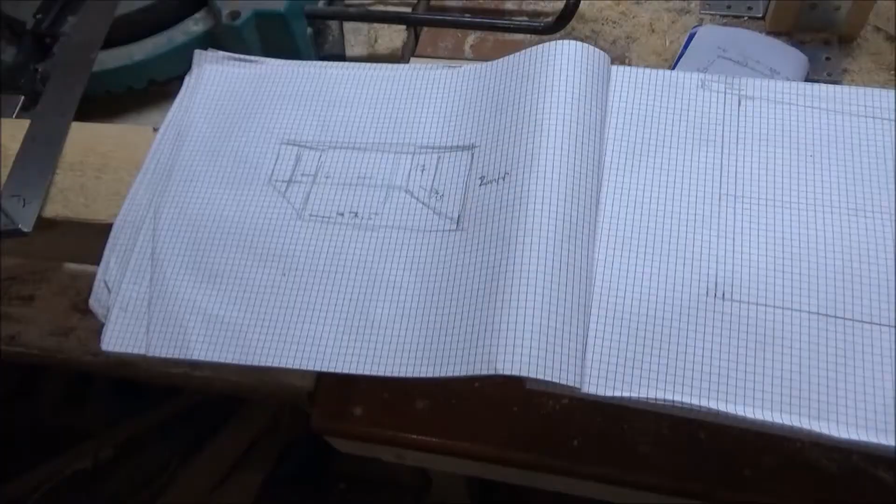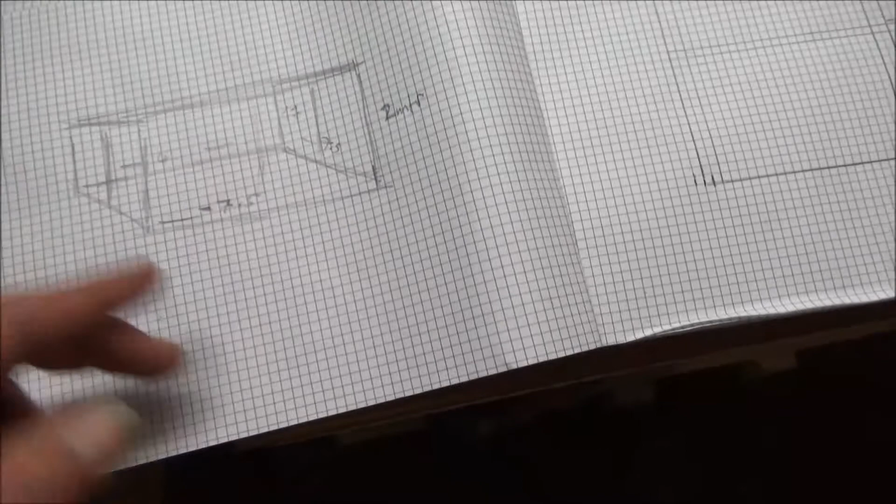So I had a few challenges getting this frame up, which I knew I'd have, but I'll show you a couple of solutions I came up with, because basically it's flat but it's not level, it falls this way and this way. So what I ended up doing, I went out with my tape measure, put a long lath and put my level on that and took a level off, starting at a point.

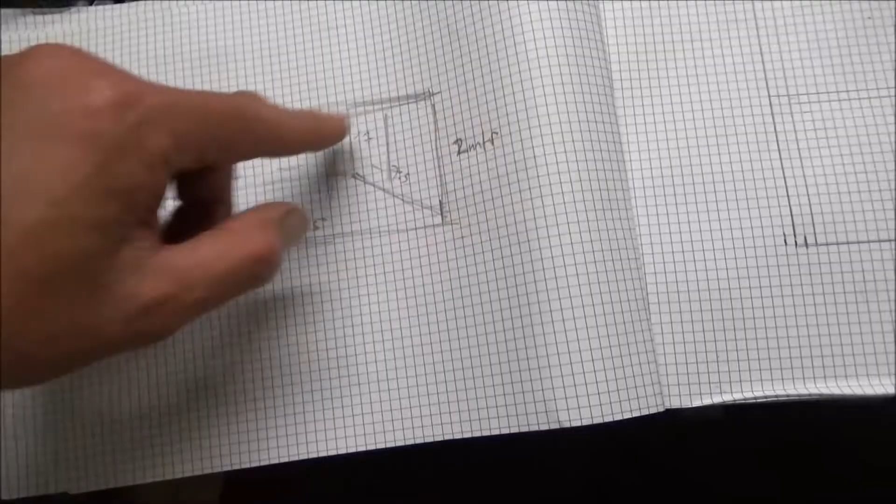That was -4, that was -7.5, that's -7.5. So I could cut my corner post, but I couldn't stand them up and support them and do all measurements, so I ran the level off at the bottom and it worked out well. I'm very happy at how that worked out.

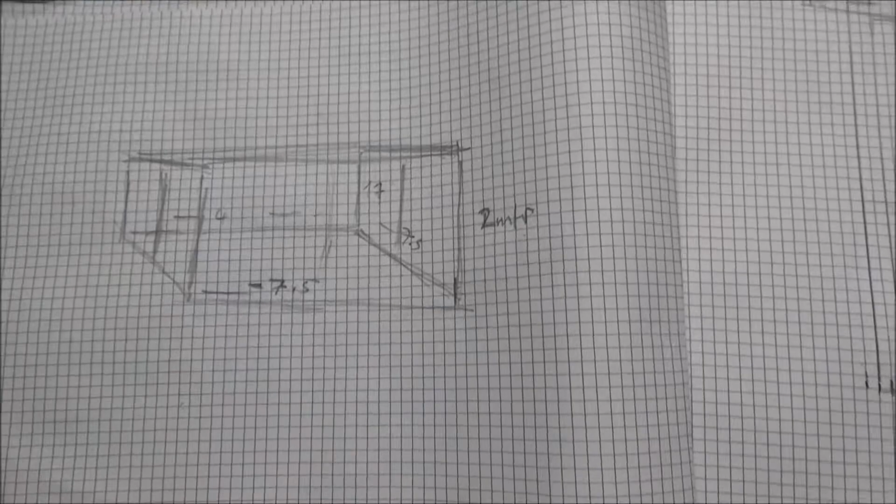I worked the angle for the roof out, and basically that's just a scale drawing so that I could find this angle here, because what I wanted to do was cut the posts in like this.

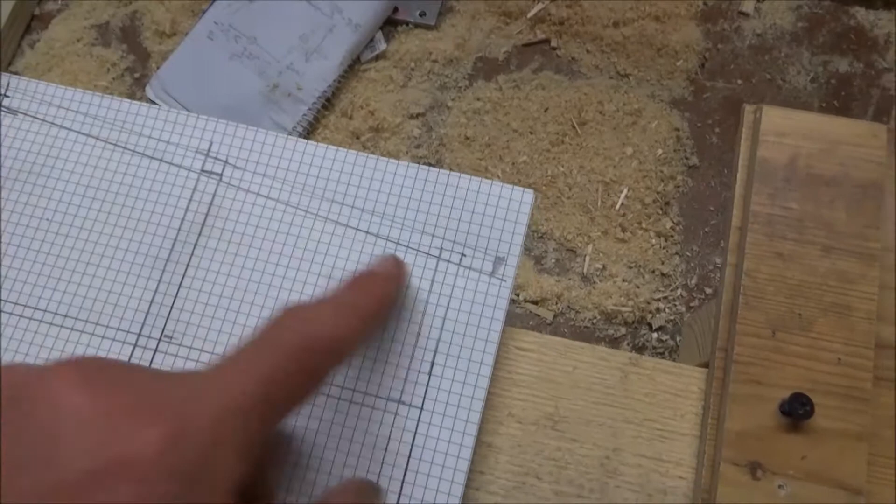Now I could do it by hand, but I ended up making a jig, screwed down, and I worked that angle out because that's coming up plumb and that's got a fall on it from 2 meters to 1.8 meters. Well, a 20 centimetre fall, because it's not 1.8 meters, the floor's not level. So that's what I meant about that.

But this worked out well, and it's cut. I've cut all of them. That's for the middle set, which will go in here.

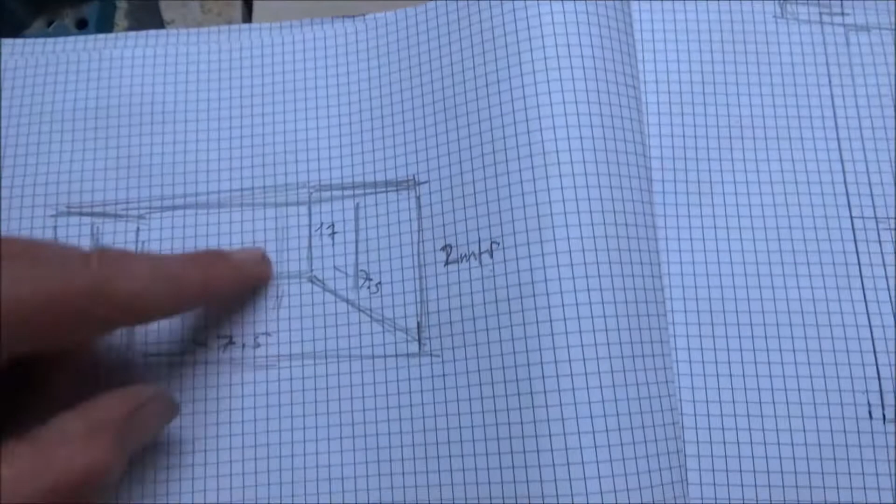But what I'm also thinking about now, I've got to put something across at about a metre height. I've got to get it all level. I'll show you how I'm going to do it.

I did think about dovetailing some roof lathing. I had a piece of roof lath somewhere, I was going to dovetail it in like that. The only reason is because I'm going to do another jig for the router, but I'm not happy, it's only 12.7, and that's the biggest dovetail I've got. What I would have done is cut that out and sunk it in like that. I did think about that, but that'd be quite time consuming, even with jigs.

So what I'm going to do is a jig and cut up posts, and cut that in so that it's flush, it runs through, and I might just put a couple of pegs in rather than screws. Look quite cool. This wood's really rough, but hey, what can I say.

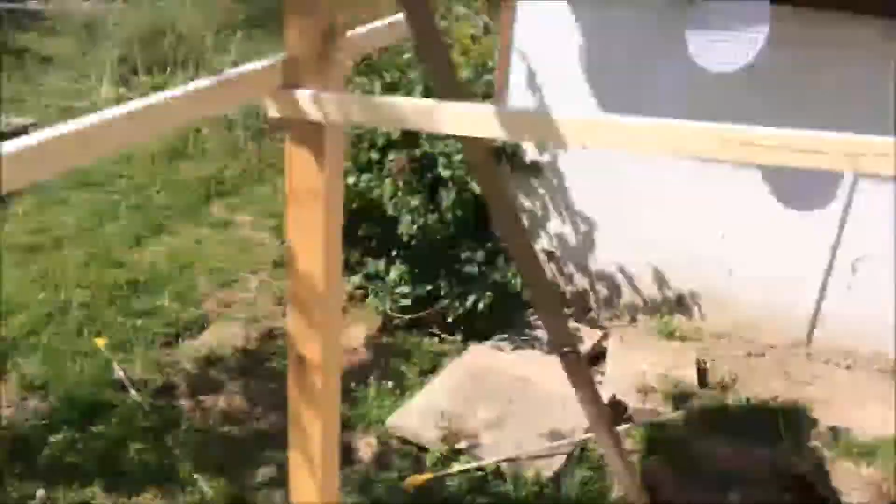I'm getting there. These I all pre-cut and was a bit worried that I might have not got the lengths right, but looking at the level, I'm alright there, across there, and they're two important ones, front and back. I've got to put another post up there.

I just made this just to make life easier and quicker, basically, so I can mark my posts out. Obviously middle posts, left and right, and corners at corners, but it made life so much easier just marking them all out at once. And I'm just waiting for the battery to charge up again.

Just use that little Bosch, it's really good for that sort of stuff, because my main worry is corners breaking off. So, but yes.

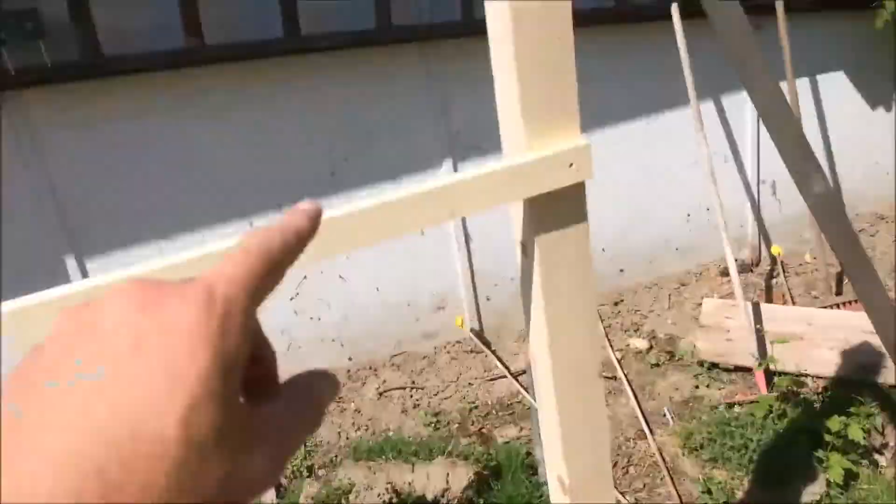3 inch. I've got to put middle ones in, but I'm going to cut them out after, going off my line across the top there and here as well. I'm doing them flat and I'm going to cut them in, just come in a centimetre at this end, and whatever it comes down to at that end of its loop, I'll cut them in.

I've just started cutting one out by hand, but I'm probably going to make a jig for the router to do that. I've got 8 to cut, and when I've started I can finish off with the router.

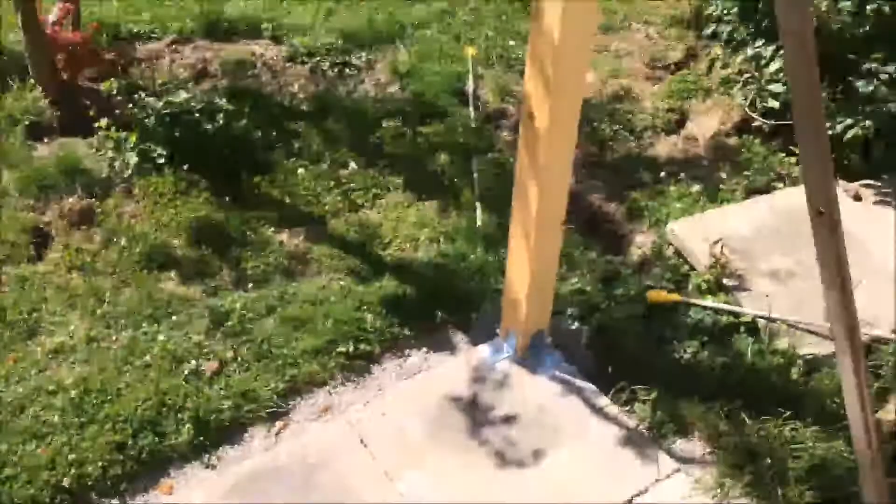I'll get these up and just squared up, because what I'll end up doing is I'll paint them where they are standing. I will take them off and paint the bottoms, and I'll paint the top before I put it on with stain. So I've only got like 2 screws holding that.

Brackets are down first, but just 2 screws in each post so I can wiggle them and get them up to square.

So these posts I want them to fit into roof beams. I've built a jig. It's messy because it started without this side and without that. It was just 2 slots to go left and right, but I was finding I was dipping in, so that just gave me a bit more support.

If I'd have ever made many jigs for a router, then I would have probably known that it needs supporting all the way around. That's what I would do if I did it again. I'm not doing it again.

I'm cutting these. I want to get it done, but that's the result from it. I'm quite pleased it fit, so I've got to neaten them up with that, with a router jig on the ones that I've already done on the roof.

I started cutting by hand, because at least I should get it more consistent and quicker. It is quicker. It's messy, but it's quicker.

So that looks alright. Didn't go as deep as I did with the template, but there's obviously no glue in that. That's just held in by fit. So

We'll put a couple of screws in the top, but that's just basically to hold the whole frame in place. It works well. I'm glad I did that.

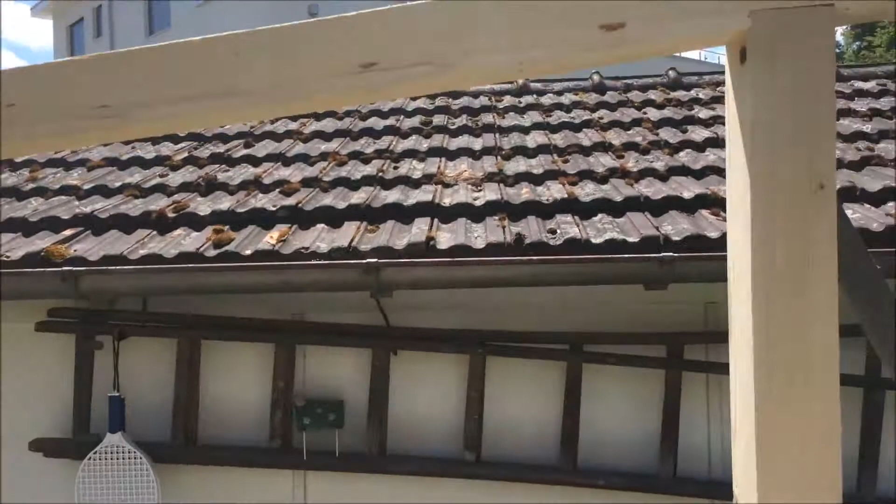It's not bad for the angle with pitch. Went for that. I could raise that. I could alter that, but I don't really need to. Point is, it's in and it's stable.

I'll have to drill it from the top, but I'll paint them before - it's handy that it's in. I'll measure that and I can cut that post to length.

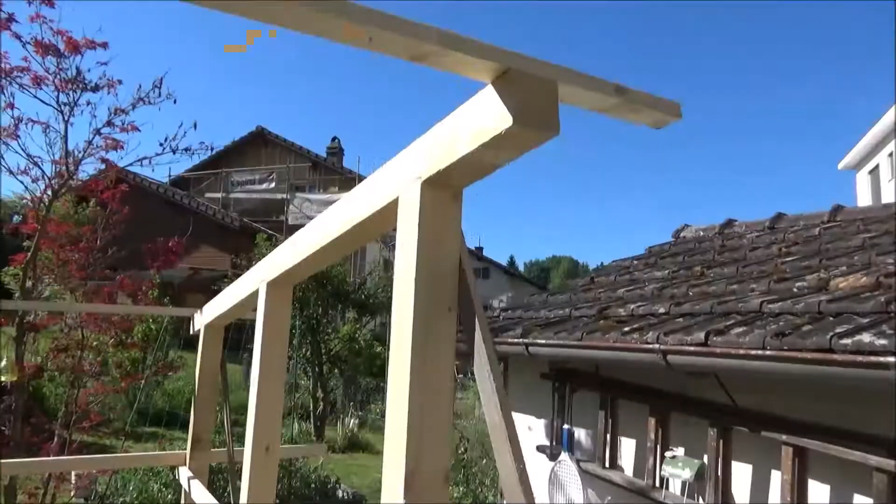Well, I got this far, and what I was saying about cutting them laths in, that's a 1 metre line from there. That's my metre. So I want to get all the framing so that I can.

I've just got to put a piece there at the back, and that one over at the roof. But they need cutting, but the roof's cut.

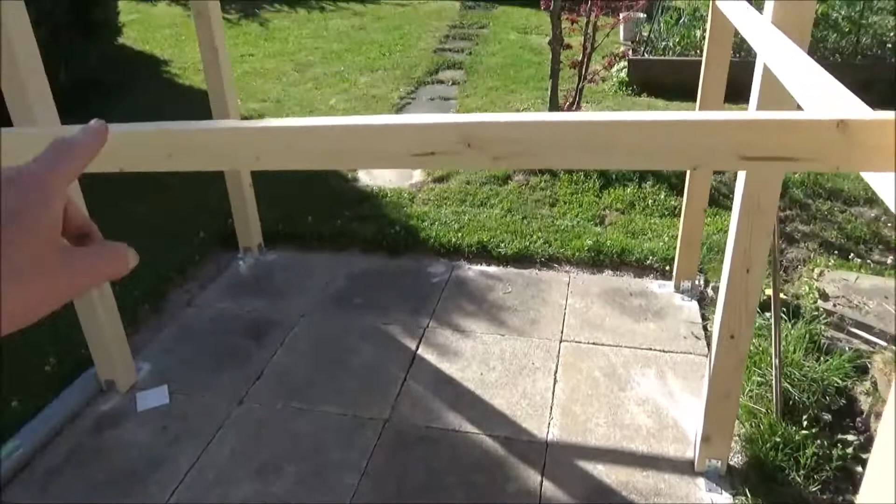But if I'm cutting these in, I can mark them all out, because if that's my metre, I'll go around from that at a level and I can take my measurements, because I've also got to cut these concrete boards because it's level at the floor.

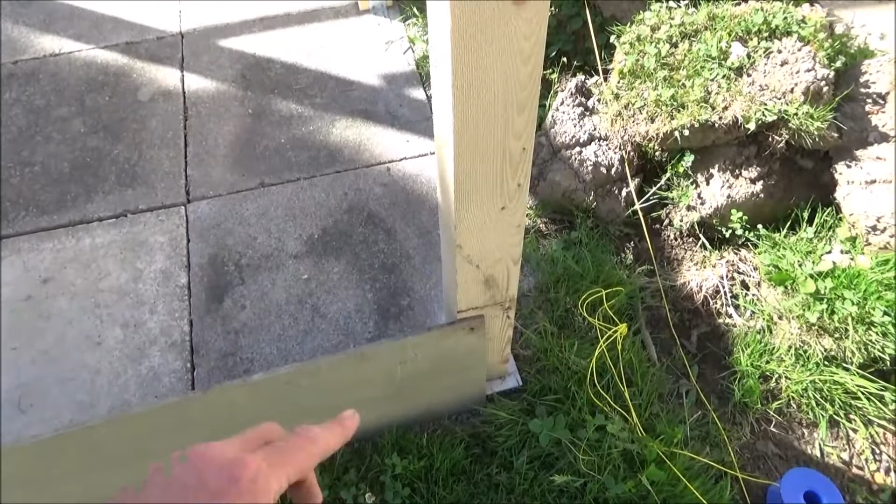And what I'll do is I'll put a lath in here, and when I've wired it, that concrete board will be screwed to the top, gives it strength.

Actually, doors go in here. I was going to put the door here, but I'm going to put it here. It's more sensible.

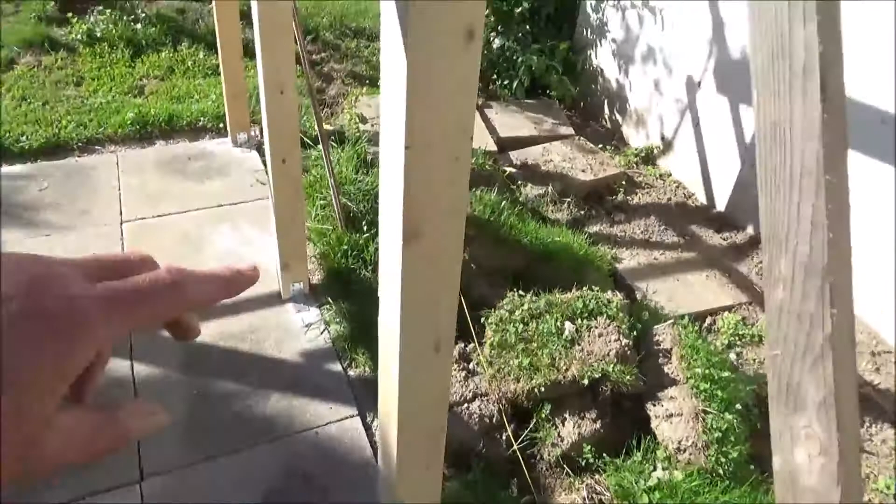And that lath will go all the way around at a metre, and one above that concrete board, and that should be good and strong.

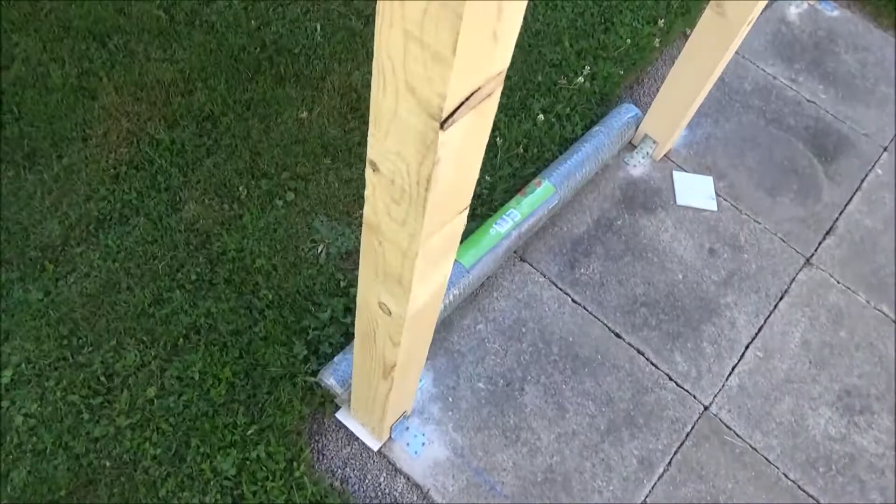Because what I've got is this 30mm bird wire. I think that should be all right. As I say, it'll be fixed well. And yeah.

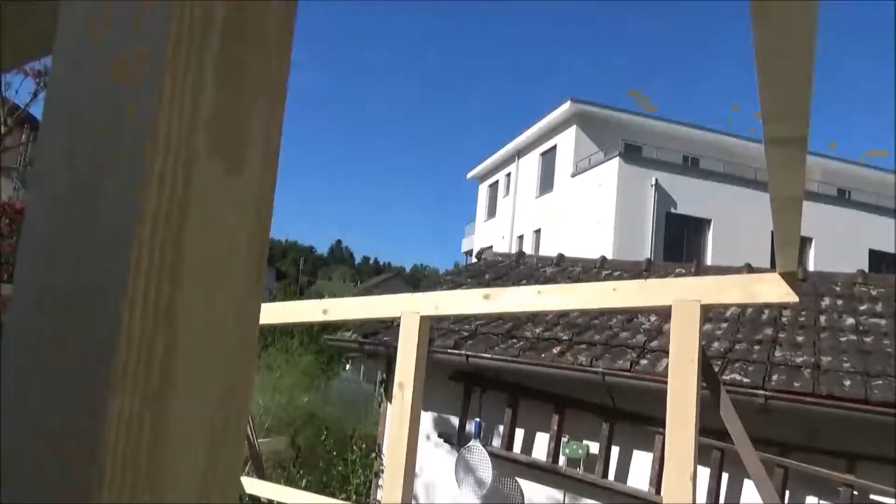I'm quite pleased how it's turned out so far. Had me thinking a bit.